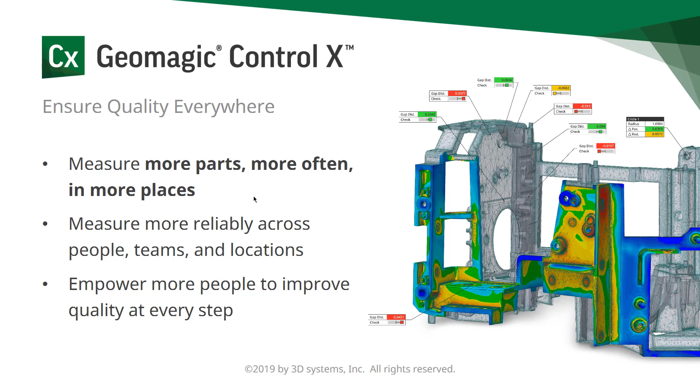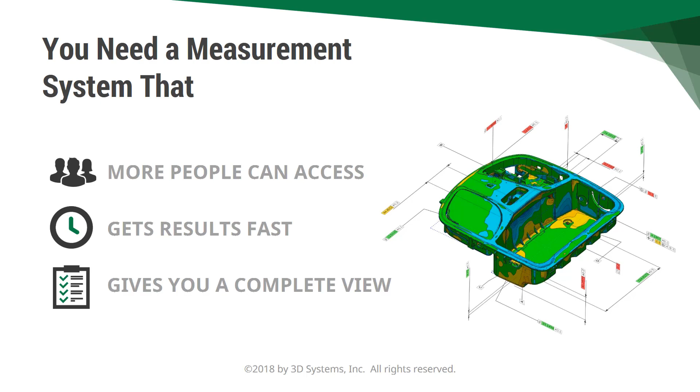And in order to do that, the way we want to get there is to measure more parts more often in more places. And we want to ensure more reliability across people, teams, and locations, and empower more people within the organization to be involved in the quality at every step of the way. So in order to do that, we need to give more people within the organization access to the data inside of Control X. That way we can get results faster and give an organization a complete view of the metrology process.

So today we're going to highlight 9 areas of improvement within Control X 2020. As you can see here, we have a lot of things going on with new updated CMM workflows, some directional tolerances, simulated CMM points. There's a lot of things to cover, so let's get started.

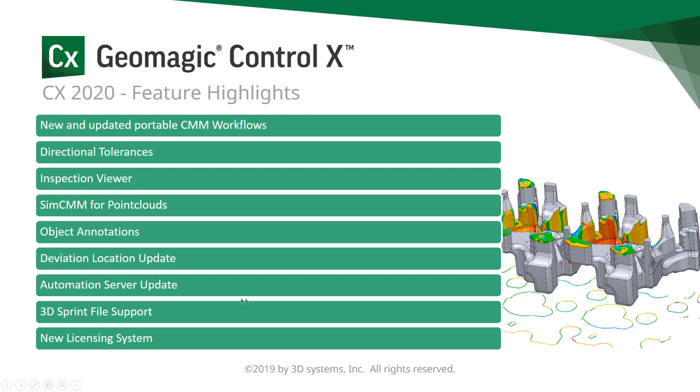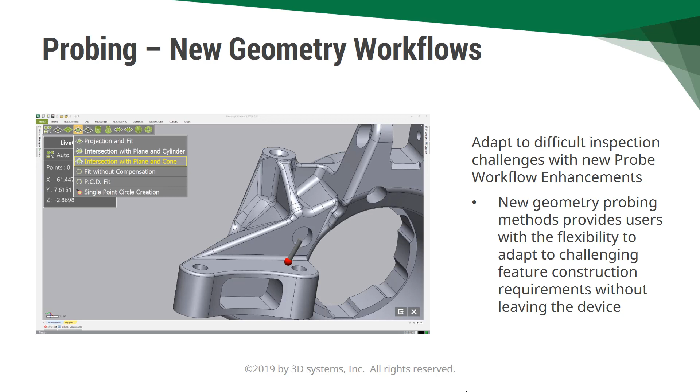First up, let's talk about new probing workflows. So we did a lot of work with probing workflows and giving you the ability to change the different construction methods on the fly while you're in the Live Geometry toolbar. We can give you different types of probing options. So in this case, let's go ahead and demonstrate.

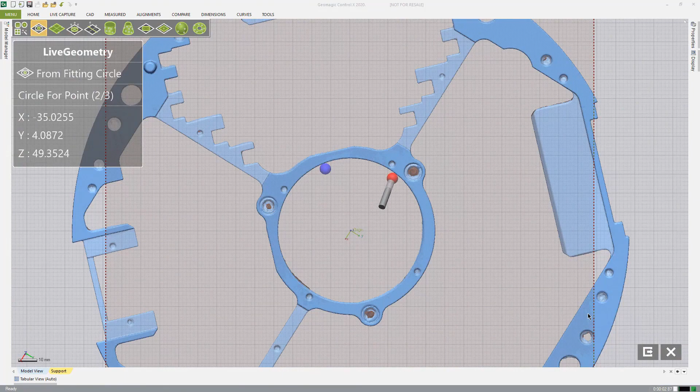We'll go ahead and probe a plane here, and then I can go to geometry type and say that I want to probe a circle on the plane. So I'll go ahead and probe 3 points and create a circle on that plane. Now if I go to geometry type, I can change, and let's do a single point circle.

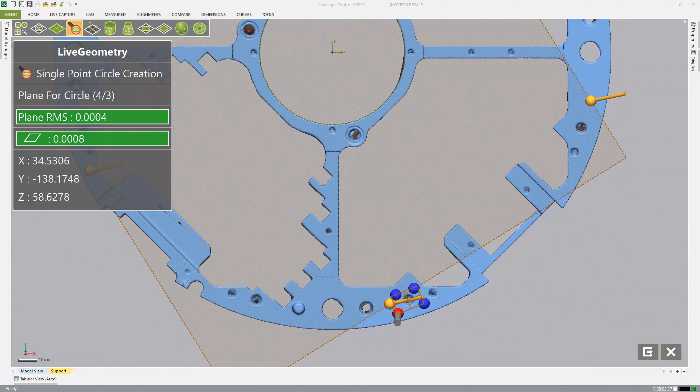So with a single point circle, if I probe a plane and I have a probe tip that is larger than the hole size, the intersection between the sphere of the probe and the plane will create a circle, thus making it really fast to probe different circle hole patterns.

Now, another thing that we did is we made it easier to call out the probing method on a pre-planned inspection. And so in this case, what we're going to do is select a circle and say that we want to create a best fit circle from that CAD. And then when it comes time to go into Live Inspect, it will use that method specifically.

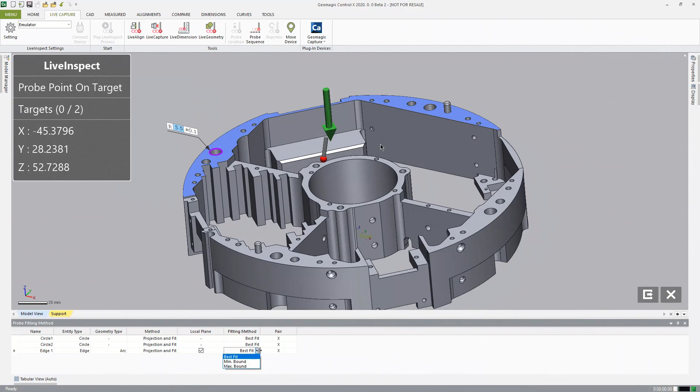Now below you can see that we have the methods outlined in the new table here. And in this table view, you can actually dictate whether or not to use the local plane, change it from a min or max method, and it will then carry those on.

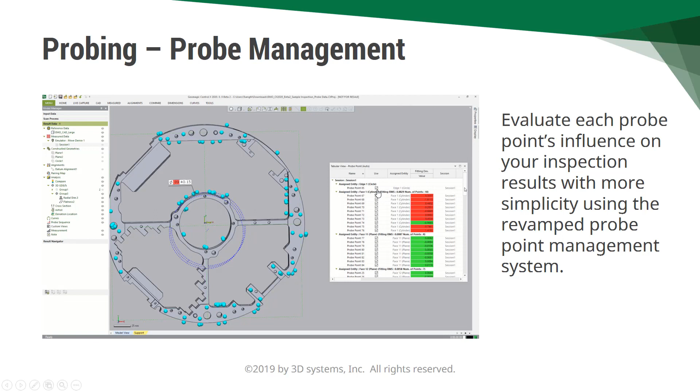Now another area within the probing category that we worked on is the probing management. So now we give you a tabular view of the probe data and even allow you to filter out the probe points that you may or may not want to include in that probed feature. So in this example, you'll see that I have a cylinder, and this is a very extreme case where I have a point that's throwing that cylinder way out.

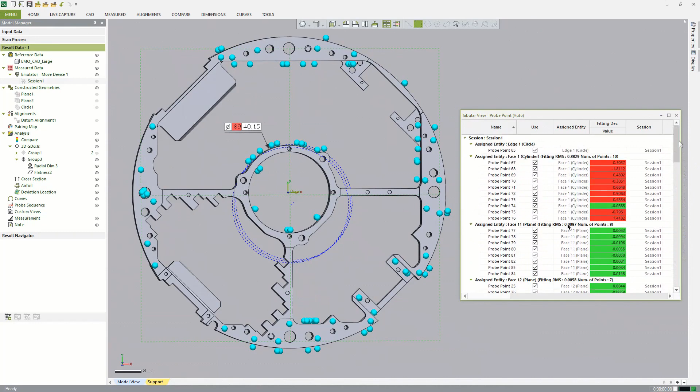So you can see all those turquoise colored points are the probed points. And then here's the new tabular view that we have. So as I scroll through this tabular view, you can see all the different features that are within the document. And then you can select each one of those points if you wanted to rename it.

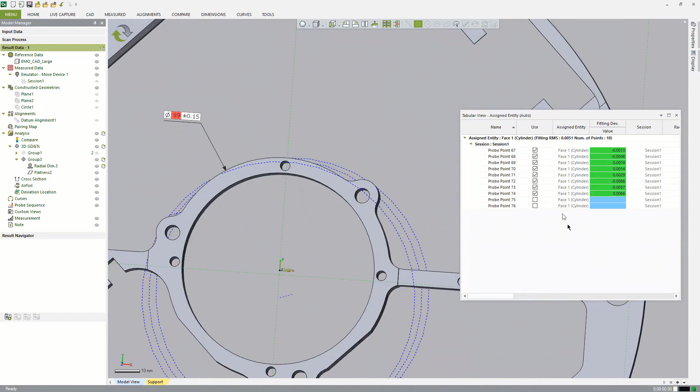And if we click on this specific cylinder here, you can see that there's one point over there that's throwing it way out, and you can cycle through, find that point, and even see the new fitting statistics get applied to the cylinder once I remove the points that I don't want. Now, if I hit rebuild, it'll go ahead and rebuild that cylinder for me and recalculate my dimensions.

The next area that we worked on is actually a new revamped move device. So we're able to use move device to inspect large parts. So many times you have to take a portable CMM and do a bunch of probing and scanning work, and then you might have to relocate that device to another area to see maybe an occluded area or maybe extend the volume of the device. So we revamped the whole interface, and it actually behaves in a very similar way to Design X now.

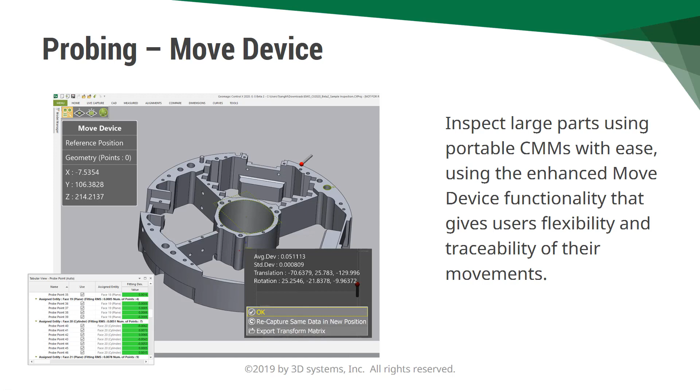Another area that we're really excited about, because this really aligns with our vision for the product, is the addition of the inspection viewer. So the inspection viewer is going to be a free tool that allows users to open inspections and projects without having to have a licensed version of Control X. This fits within our vision again, and now everyone across the organization has the ability to use the inspection viewer.

It allows you to open projects. You can edit display properties, create reports from the data contained in a CX project file. It does not need to be licensed. Again, once a user installs Control X, you have access to either the full Control X with a license, or it defaults over into a viewer if no license is available.

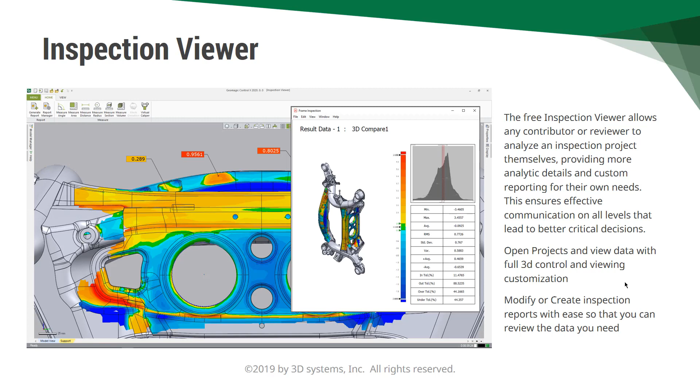So again, you can open up full CX project files and control different views and reporting options and even add more screenshots. So let's go ahead and take a look at the interface of the viewer. So if we go ahead and open up an existing inspection, you see that we have a probing inspection here. So I have a bunch of probed points and features here with dimensions.

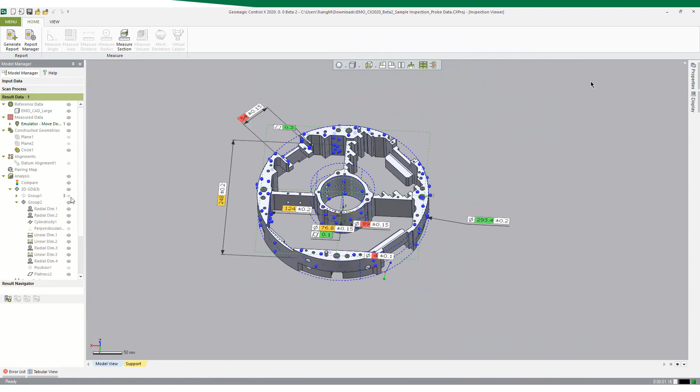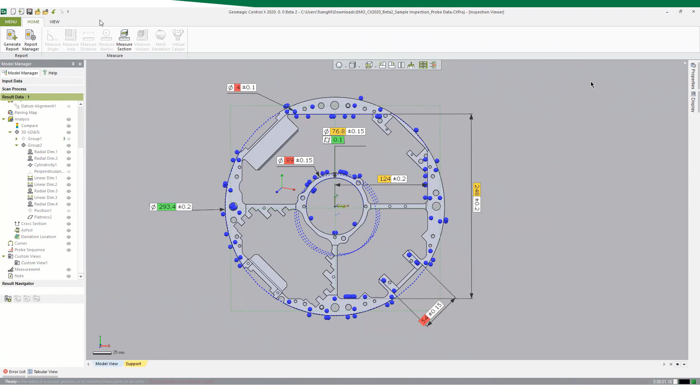And you see that the features themselves are grayed out and they cannot be edited. But you do have the ability to control the visibility over all these different objects. Now below you can see that I can turn on and off the different dimensions and move them around and reorient this view. So if I wanted to create a custom snapshot or a viewpoint, I can go ahead and create one, and then I can toggle over and generate a report.

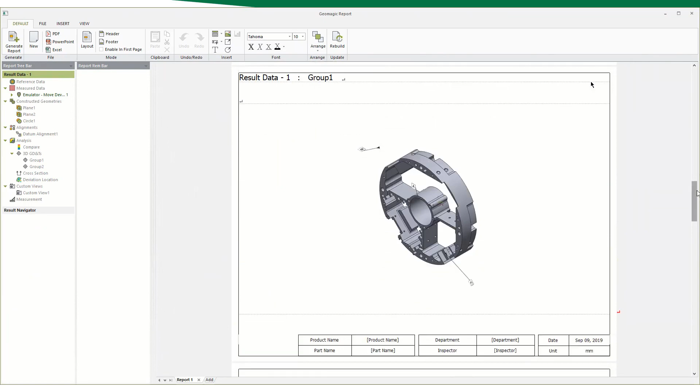So we're able to take the data that's already contained within this document and customize and create our own report inside of Control X Viewer. So you see that I took some of the options out and I say I only want to report on these objects here. And it takes me into our report customizer tool. And if I scroll down, you can see where I have my custom viewpoint that we created.

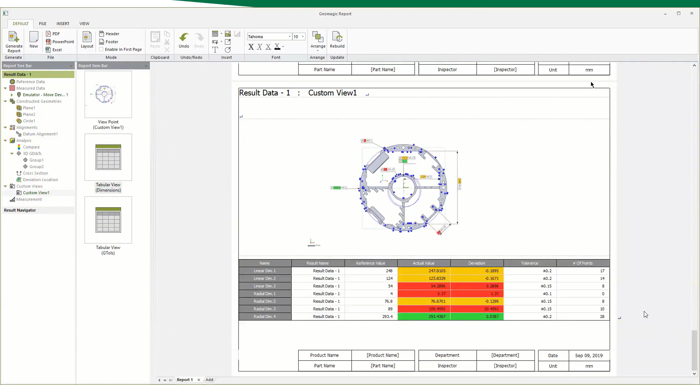And then if I want to, I can edit the report, move the table, change the size of the picture, the screenshot. So here's another example of taking a scanned data set inside of Control X. So in most instances, you cannot create any geometry inside of the viewer, but in this instance, what we're able to do is take a 3D comparison and update the color bar options so I can see a new scale.

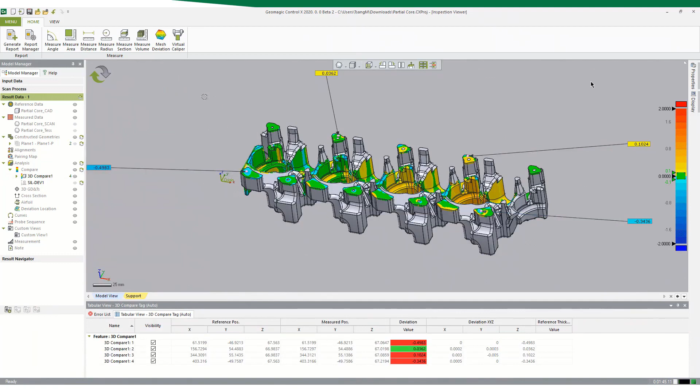And then I can even pull new annotations on this data set. This is one of the few areas where you can actually create a new dimension within the viewer, and it has to do with 3D annotations from a 3D comparison.

Then if I want to, I can come in and edit the annotation style. You can see I could throw the deviation in there. Another new feature of Control X 2020 is the addition of directional tolerances to the feature.

So we added the ability to tolerance the X, Y, and Z locations independently inside of Control X. We also went ahead and updated the ASCII geometry importer to also support those directional tolerances as well.

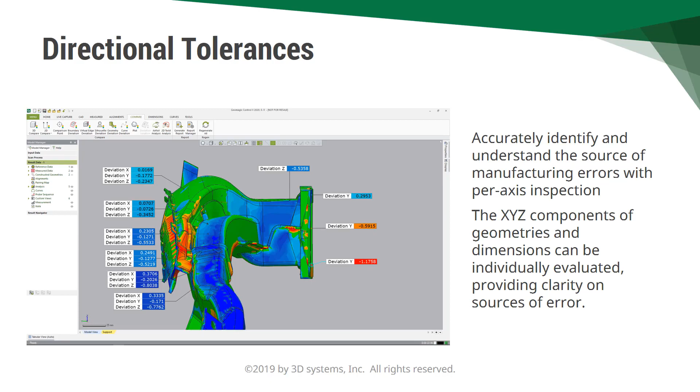In this example, we'll go ahead and add separate tolerances to the circle in the deviation tolerances section. So you see inside of this circle, down below we have deviation tolerance, and then you can control the X, Y, and Z tolerances separately now.

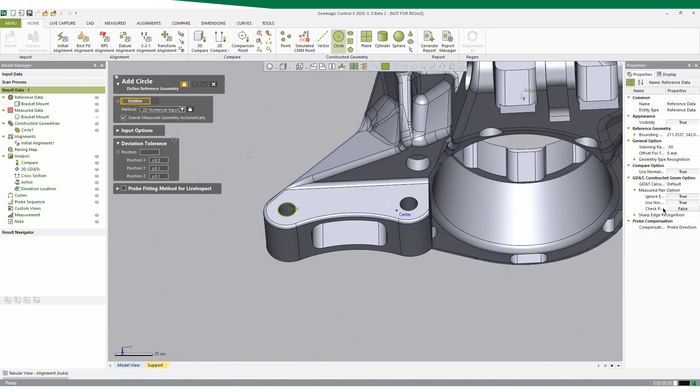So then you can even change it and create a different tolerance on the different circle. So now you see that I've created 4 different circles on the model with different X, Y, Z tolerances.

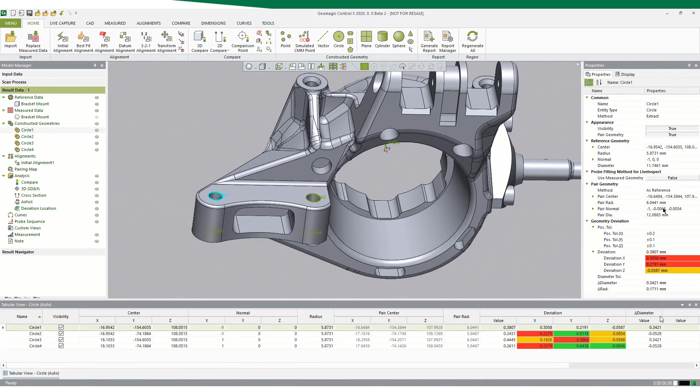And the tolerances are also available in the properties, not just in the circle feature. And then they're available below in the tabular view. So if you scroll all the way over to the right, you'll see the deviation X, Y, and Z over here, and you have the ability to change them from that location as well.

So if you wanted to go ahead and update that to 0.3, you can change that from the table itself, or toggle back to or update it to 0.5. And then you'll see the colors update.

Now, if I select all of them and go ahead and update the deviation of all of them all at the same time, I can do so.

To go along with the directional tolerances, we also added the ability to create groups of similar annotations. So now we can apply separate annotation presets to individual dimensions, offering users the ability to further customize their reports. Users can also create their own annotations based on just the information you want shown. Let's look at how this works.

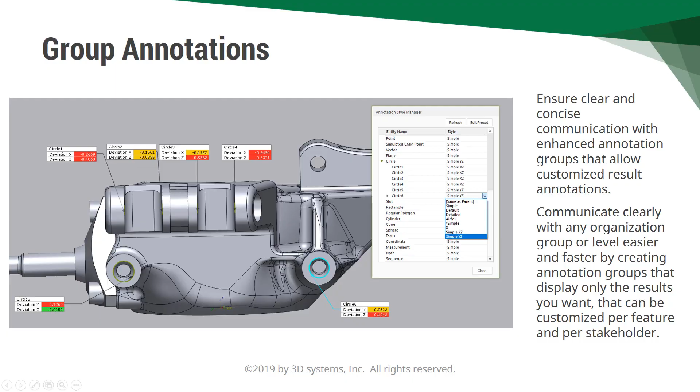So if I come over to edit annotation, you see that there's this new style manager. In the style manager, you can look at all the different categories of dimensions. So if we highlight circle, its preset is simple right now, but you could toggle it over to detailed or default, and you see we can cycle it through all these different default views.

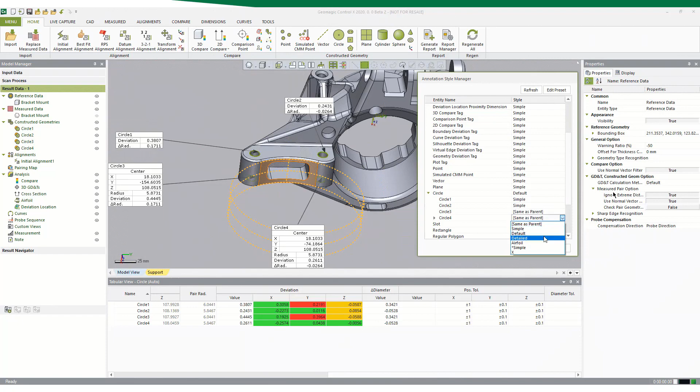Now that controls all circles, but underneath I can dictate individual circles. Some have simple, some have detailed toggles. So now I can control each individual circle's annotation viewpoint and customize its look and feel.

So if you see, if I click on that and I say edit preset, we also have the ability to create our own. So if I wanted to come in and edit that annotation preset and toggle over to simple, you see that I can change the label and the annotation from there.

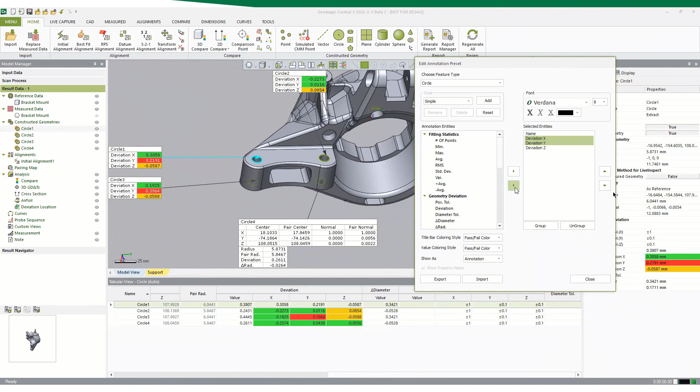Now I can change the view, add the different deviation X, Y, and Z that we just talked about, and put that in this circle's specific simple view. And then I can update and toggle that over here in the view. So that's the new annotation grouping.

We've also updated our simulated CMM points to work off of point clouds and polygons. As many of you already know, we've created these simulated CMM points to allow users to essentially virtually probe objects that have been scanned. And what that helps us do is kind of convert older workflows into more of a modern scanning-based workflow, because it allows us to probe things virtually the way we would have done maybe on a traditional CMM. So let's see how this works.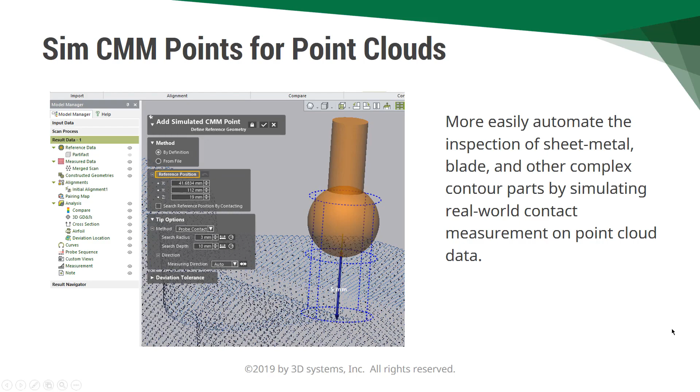Here is an example of a blade here, and I actually have a simulated CMM point contacting the side of the blade here. So you have the ability to adjust the direction, adjust the size, even change the different contact method, whether it's a probe or a rod, disc.

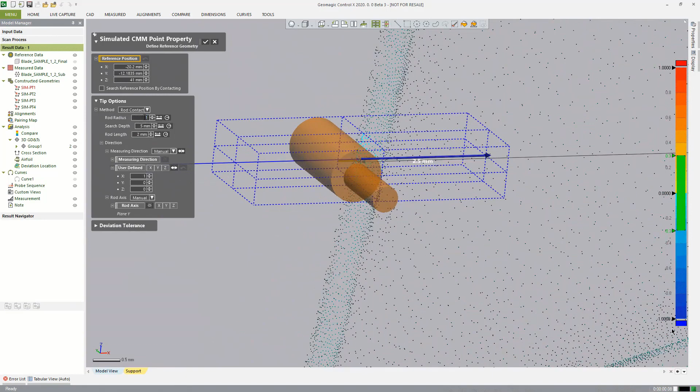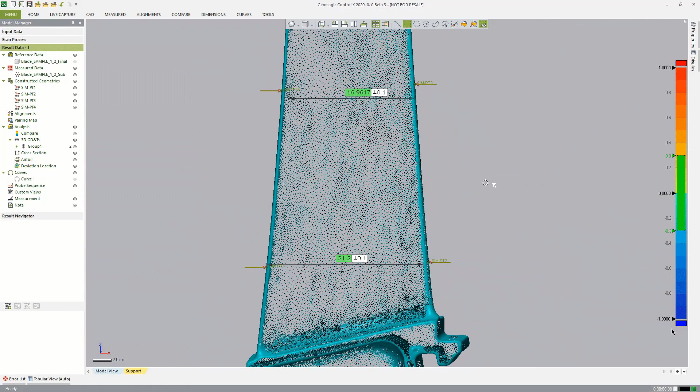So all of these different simulated CMM points, they allow you to not only probe the object in a traditional fashion, but it will also help with different types of alignments as well. So you can use these simulated CMM points to create alignments. You can make dimensions off of them as you see here. And then we can even use them for a lot of other things as well, such as construction objects for features. An example would be selecting a few probed objects like this and creating a plane from them.

Here's one of our favorite additions to CX 2020: we've updated the deviation location. In the last version, we added deviation location.

For those who don't know, we measure surface defects mainly for aerospace and automotive applications. We can extract the deviation from a surface normal, and then annotate different characteristics of it, so we can measure the distance from a certain location, or the depth of each dent in the surface. There's a lot of different things you can do here.

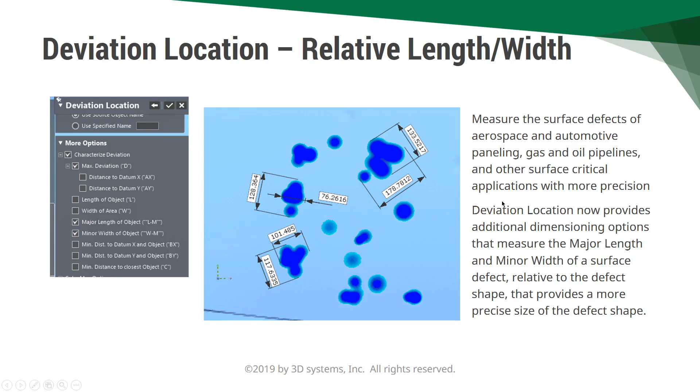In this version, we added the ability to measure the relative length and width regardless of the orientation, as you can see on the screenshot. So let's see how this works.

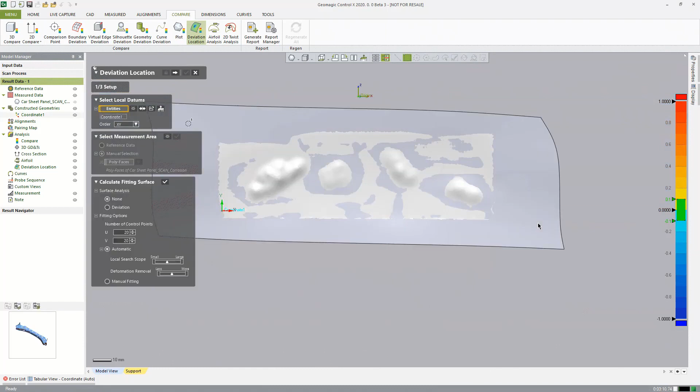If I zoom into this sheet metal part, you see I have some defects in the surface. I can go ahead and select my coordinate and then select the poly faces that I want to work with. Once I create that selection, you'll see the method we use: we actually create a CAD surface in the background that eliminates those defects.

In there, we have different extraction characteristics we can apply to it, so we can look for things that are beyond a certain depth. Then I can find all those deviation objects and go to the next step to characterize them.

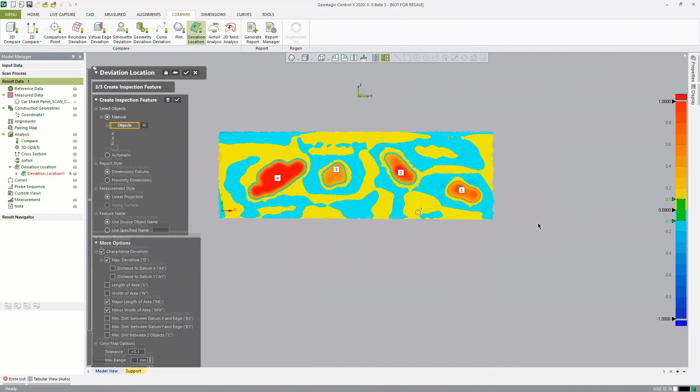So in this instance, if I want to dimension them based on datums, I can toggle on the max deviation for each one, and I can turn on the major and minor width, which is the new functionality we have here.

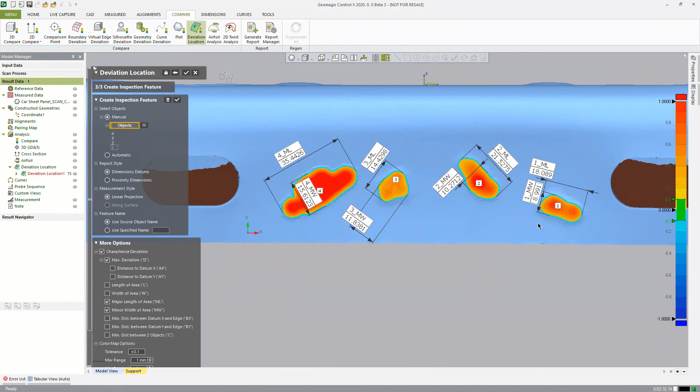I can even toggle on and off a color map of the objects and different types of views to show the dents in the surface. Now when I hit the checkbox, you'll see it creates the 2D dimension of each object to characterize its major length and minor width. So that's the new features inside of deviation location.

The software will automatically grab scans, inspect them, and output them with all the different settings of Control X to a certain location. What we've updated in this version is this ability to get triggered. There are different options of triggering here.

So now if my scanner scans this object from 6 different viewpoints and I have 6 different individual files, Control X will grab them and automatically take those 6 objects and use them all inside the same inspection, because they're the same object, right?

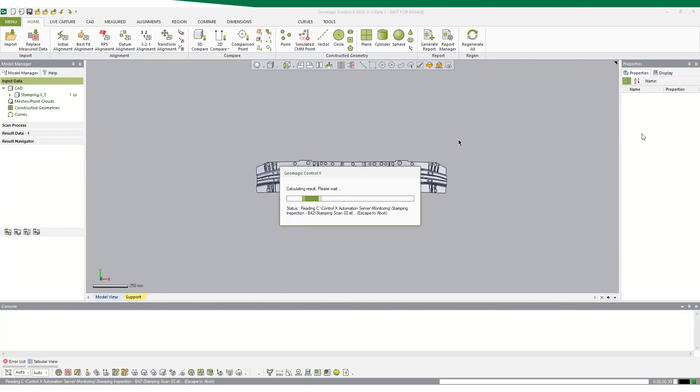So if we drag those into the sample monitoring folder, as soon as you put the 6 files in, Control X will grab them and handle them as one inspection. Now Control X automatically runs a pre-planned inspection on those 6 files. You can see it went ahead and measured the sheet metal part, and on the output side, there's now a folder with my stamping inspection, and a PDF report representing that inspection of the sheet metal part.

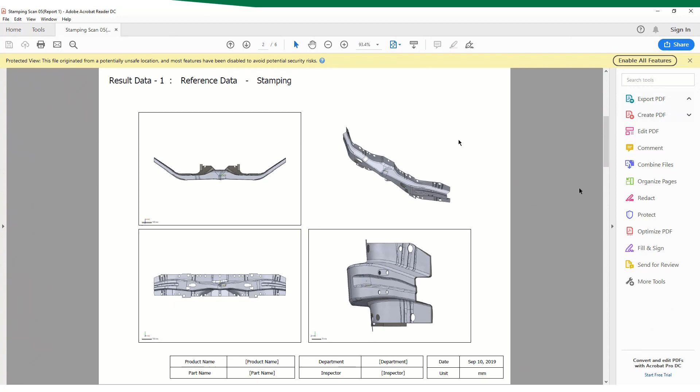So the enhancement here is the ability to trigger Control X in a variety of different methods beyond just having a single file hit our folder. We can actually use scan counts, file name, or time interval to get triggered.

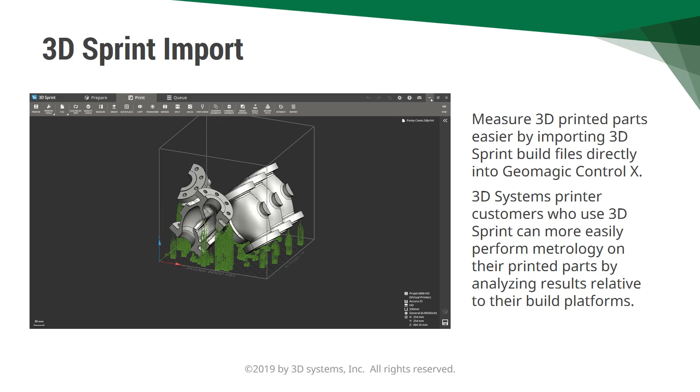And finally, we're excited to announce a new 3D Sprint importer, so we'll be able to measure 3D printed parts easier by importing the 3D Sprint files directly into Control X. We're excited to import the data straight from the stage inside of 3D Sprint into Control X and use that as a nominal for inspection of your 3D printed parts, giving us the ability to do additive inspection.